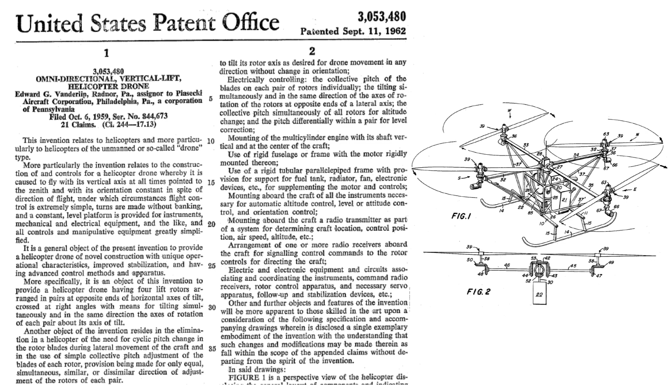Another object of the invention resides in the elimination in a helicopter of the need for cyclic pitch change in the rotor blades during lateral movement of the craft, and in the use of simple collective pitch adjustment of the blades of each rotor, provision being made for only equal, simultaneous, similar, or dissimilar direction of adjustment of the rotors of each pair.

Still another object of the invention resides in the provision of a 4-rotor helicopter drone having similar rotors equidistantly spaced at the ends of 90-degree disposed axes, the direction of rotation of the rotors on one axis being alike and opposite to those on the other, whereby torque balance is effected, together with means to drive all rotors at the same speed, and means to separately and inversely adjust the pitch of the 2 pairs to correct for inadvertent yaw, whereby orientation may be maintained constant, or by opposite tilt of either or both pairs of rotors achieve lateral flight in any desired direction.

A further object of the invention consists in the provision of automatic stabilization and control means for the helicopter drone described, including rotor pitch adjustment and rotor tilt servo means, attitude, altitude, direction, and other condition-responsive means and associated command and control devices, mixing circuits, and the like adapted to provide a fully automatic drone capable of holding a position, a course, or an altitude and/or changing any or all of them on radio command.

Among still further objects and features of the invention may be recognized the following: constructional characteristics of the fuselage contributing to the stability, lightness, and operability of the drone. Arrangements for folding the rotors of one pair and their drive and support means to effect major savings in storage space required, especially helpful aboard ships. Simplified transmission means between the engine and the rotor drive shafts to synchronize the rotors and effect opposite rotation of the pairs. Mounting of each rotor at the end of a tube housing its drive shaft and arranging the tube for partial rotation to tilt its rotor axis as desired for drone movement in any direction without change in orientation.

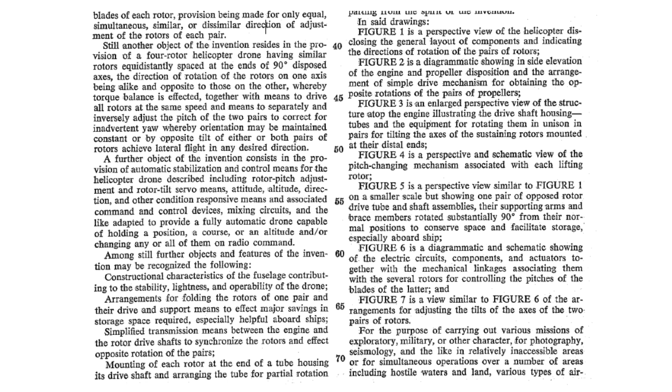In said drawings, Figure 1 is a perspective view of the helicopter, disclosing the general layout of components and indicating the directions of rotation of the pairs of rotors. Figure 2 is a diagrammatic showing in side elevation of the engine and propeller disposition and the arrangement of simple drive mechanism for obtaining the opposite rotations of the pairs of propellers.

Figure 3 is an enlarged perspective view of the structure atop the engine, illustrating the drive shaft housing tubes and the equipment for rotating them in unison in pairs for tilting the axes of the sustaining rotors mounted at their distal ends. Figure 4 is a perspective and schematic view of the pitch-changing mechanism associated with each lifting rotor.

Figure 5 is a perspective view similar to Figure 1 on a smaller scale, but showing one pair of opposed rotor drive tube and shaft assemblies, their supporting arms and brace members rotated substantially 90° from their normal positions to conserve space and facilitate storage.

For the purpose of carrying out various missions of exploratory, military, or other character, for photography, seismology, and the like in relatively inaccessible areas, or for simultaneous operations over a number of areas, drone craft have been resorted to, but with indifferent success. Aircraft of the more or less conventional type requiring substantial flight speed for maintaining their elevation are obviously incapable of carrying out missions requiring hovering above one area for a sustained period.

For control of flight direction, both elevational and lateral, and speed, as well as maintaining hovering, radio signals may be transmitted from a remote control position and received on the aircraft, and there generate control voltages, which are superimposed on those originating aboard the aircraft by means of a set of mixing circuits, whereby to place the control of the craft, as regards position, direction, and speed of flight and elevation, with the remote operator. For carrying out the above desiderata, the apparatus is constructed in accordance with the showing in the drawings, to which reference should now be had.

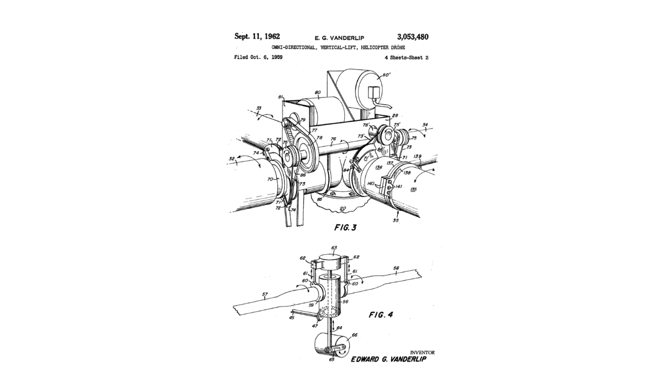Each rotor is equipped solely with means for collective pitch control of the blades thereof, such as illustrated in Figure 4. This figure is highly diagrammatic and does not illustrate all of the mechanical details. As shown, the sleeve 56 may be toothed on its lower edge, corresponding, for instance, to gear 49 and meshing with pinion 47 driven by shaft 45, such as shown in Figure 2. The two blades 57 and 58 of the rotor have their inner ends appropriately journaled in sleeve 56 for rotation about their own axes, whereby pitch adjustment is achieved.

Such rotation must be in opposite directions for the two blades, as illustrated by the arrows, so each blade has secured thereto a collar 59 having an arm 60, to which is pivoted, as shown, a link 61. The arms 60 are normally directed oppositely, and the two links are pivoted as illustrated in arms 62 extending from head 63, vertically adjustable through the offices of rod 64, articulated to the end of radius arm 65, driven from or by the shaft of motor 66, suspended beneath the gear housing 37, as seen in Figure 1,

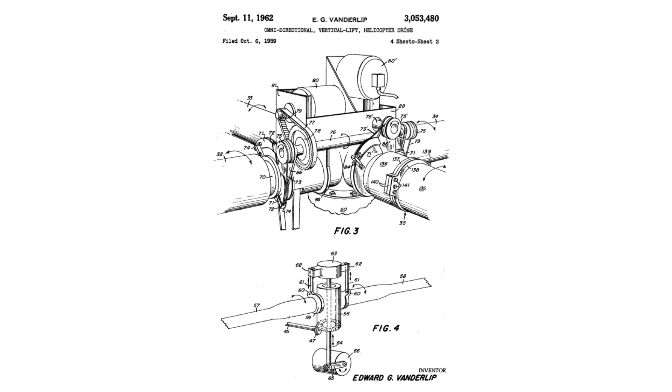Earlier in this specification, mention was made of the ability to rotate each of the propeller-supporting sleeves, 32 to 35, inclusive, for the purpose of inclining the axis of rotation of the rotor at its end. Figure 3 illustrates in perspective the arrangement and mechanism for achieving such results. Here the sleeves 32 to 35, inclusive, are positioned as in Figure 1, above the motor 20, and radiate from housing 28. The inner end of each sleeve or tube is reduced in diameter,

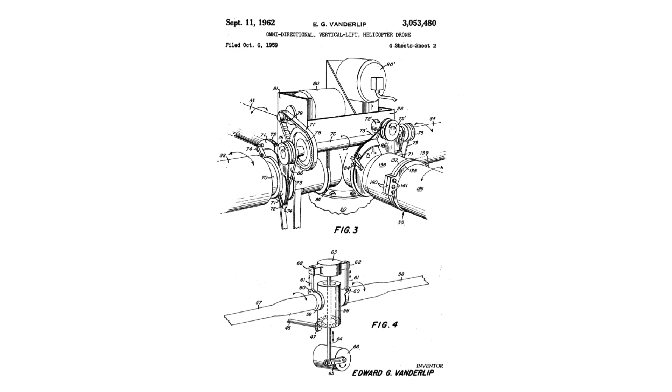as shown in connection with tube 32 at 70, the better to fit it with a pair of arcuate segmental pulleys 71 arranged side by side, and each having a peripheral groove 72 to accommodate the operating cable 73, which passes oppositely through each groove and is secured in an end member 74.

The two partial pulleys 71 are spaced side by side, and the same cable 73 is fastened to end members 74 of both and passes about a turn and 1/2 in a groove in the small diameter pulley 75, mounted on the end of shaft 76, running parallel to one of the sides of the housing 28 and supported therefrom in bearings, not shown.

The other end of this shaft has identical pulley, cable, and partial sheave construction, as just described, for actuating tube 34 in unison with tube 32 by the rotation of shaft 76 to a limited degree by means of the flexible, toothed belt 77, surrounding large diameter sprocket 78 on shaft 76 and pinion sprocket 79 on the shaft of reversible electric motor 80 mounted on end plate 81 of housing 28.

This housing also supports a corresponding but displaced shaft 78A, having at its opposite ends the pulleys 75, connected by cables 73 to sheaves 71 on tubes 33 and 35. A second electric motor 80', connected as motor 80, rotates shaft 78 in either direction to achieve adjustment of tubes 33 and 35, and hence of the axes of the rotors thereon. It will be seen from this construction that the axes of each pair of rotors at opposite ends of a horizontal axis must move in the same direction, or in other words, always remain parallel with each other.

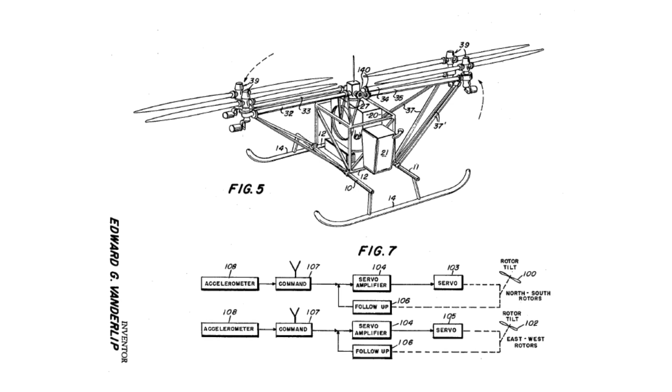In order to facilitate storage of the drone, and especially aboard ships where space is at a premium, means are provided to permit the hinging of two of the pylons which support the rotors at their outer ends, and Figure 5 shows the final result where the tubes 33 and 35 are substantially parallel with 32 and 34, which remain fixed in position.

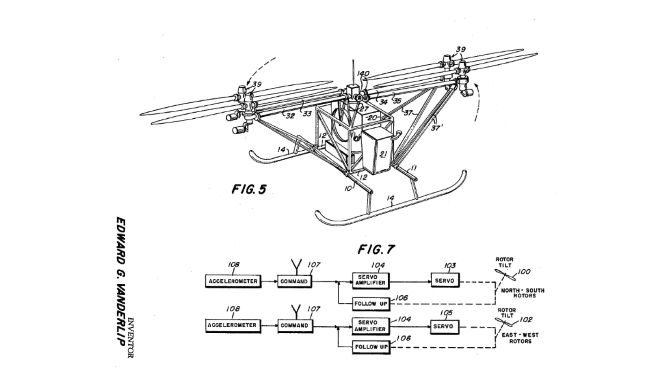From this figure, it will be noted that tubes 33 and 35, normally in transverse alignment across the craft, are each adapted to be hinged in a counterclockwise direction. In order that this movement may be effected, Figure 3 illustrates the manner of hinging the rotor shaft housing tubes for folding. It is shown only on the tube numbered 35 at the lower right,

and here the outer section is transversely separated from the inner section 136, and each of the abutting ends is fitted with a collar 137, 138. Each collar at diametrically opposite positions has a broad radial extension. Two of these, 139, are formed into a hinge by an appropriate vertical pin, while the other two, 140, are arranged to receive through bolts 141, whereby the sleeves may be held in alignment.

The shafts, such as 45 and 46, which are housed within the sleeves or tubes, are severed on the same lines as the tubes, and adjacent bearings, not shown, carried by the tube sections, support the shaft ends. These ends thus being held in appropriate alignment may be fitted with short splined connecting means which automatically mate as the tubes are brought into alignment, care being taken to adjust the rotors to ensure their proper phasing before this takes place. This may readily be achieved by having only one position in which the two shaft sections may be coupled.

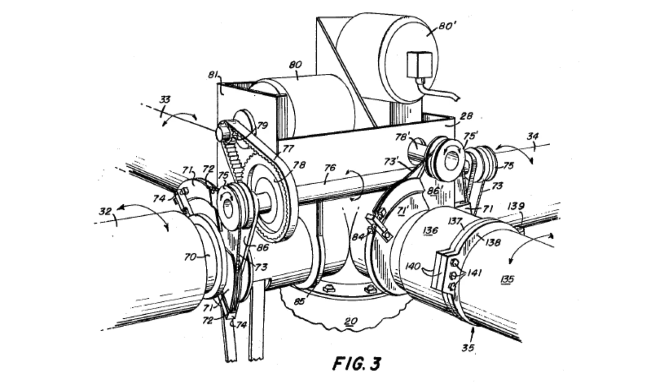The helicopter built as just described has many advantages, first among which is simplicity. For all parts of the frame, motor mount, and the like are rigidly connected together, and there are no universal joints, hinges, flexible couplings or the like, and thus no alignment problems. Only the electronic and control components are shock-mounted. Second, the motor is vertical and in the center of a parallelepiped frame of tubular construction, which supports the base and gasoline tank, as well as a radiator and, if desired, the electronic devices.

Third, all of the rotors, pylons, gearboxes, and the like are identical in construction, and the simplest of gearing is used for drive. Fourth, the arrangement, sizing, and disposition of the rotors, as well as their direction of drive, automatically eliminates any rotational torque, and hence no counter-torque mechanism is required with its complex variable speed drive or pitch control. Fifth, the aligned cross tubes simultaneously adjustable in pairs for rotor tilt permit the determination of the direction of flight without changing the orientation of the craft.

Sixth, by simplifying the rotors so that they are adjustable only for collective pitch of the blades, many excess components are eliminated. The rotors in pairs are simultaneously adjustable and are adjustable differentially between pairs for torque unbalance for yaw stability. The rotors on opposite ends of the same axis are differentially collectively pitch adjustable for roll and pitch stability. And lastly, for altitude change, the collective pitch of all four rotors may be adjusted simultaneously in the same direction.

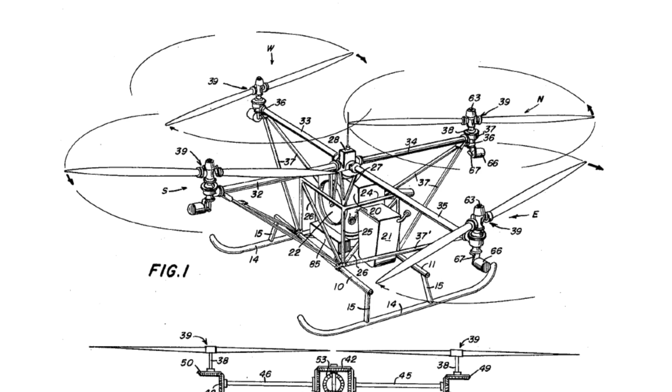An examination of Figure 7 will show the simplest form of combining command and local signals for controlling the tilt of the rotor axes to provide for lateral movement of the craft in any desired direction in accordance with the degree of tilt and the direction thereof imparted to each pair of rotors.

Referring now to this figure, it will be noted that the rotors have been designated as respectively north and south and east and west rotors, and each pair is illustrated by only a single rotor numbered 100 for the north and south pair and 102 for the east and west pair. Since those of each pair are both operated in tilt in the same direction, only a single servo, 103, for the north and south rotors, and 105 for the east and west rotors is illustrated.

These may be any known devices for converting electrical signals to mechanical energy commensurate therewith, and each is energized by a servo amplifier of known type designated 104. Each servo-actuated mechanism moves a follow-up device 106, which detects the degree of adjustment and feeds back a signal to the servo amplifier to terminate the movement when the desired degree of adjustment has been achieved.

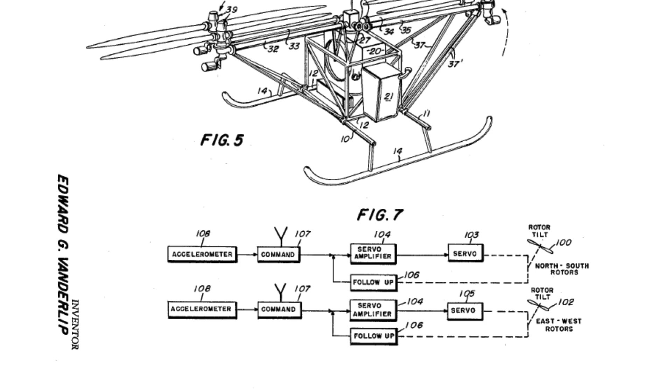Each servo amplifier is shown as under the control serially of a command radio receiver 107 and of an accelerometer 108. Obviously, the command receiver obtains its signal from the appropriate radio transmitter previously described, while the accelerometer is a known type of apparatus aboard the craft for detecting change in rate of movement in the directions controlled by the type of tilt of which its rotors are capable. Thus, when the craft is intended to be stationary, each accelerometer detects motion in either direction in which the tilt of its rotors is capable of moving the craft, and generates signals to provide opposite tilt.

110, 111, 112, and 113 respectively, capable of simultaneously adjusting the pitch of both blades thereof to either increase or decrease the lift thereof. Such servo device will of course include the motor 66, such as seen in Figure 4, and is energized from the appropriate servo amplifier, 115 to 118, under the control of commands from craft-carried instruments and radio signals, as well as the associated follow-up device, such as the one designated 120 on the north rotor, which provides for a feedback from the rotor pitch position to the input of the servo amplifier to limit and maintain the desired setting or commanded adjustment.

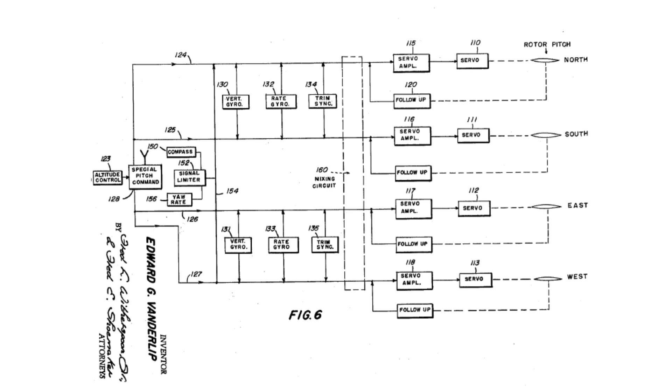The dotted rectangle 160 marked mixing circuit is symbolic of the rather complex electric circuits necessary to bring about the connections and operations of the instruments as above described. But since these are quite similar to those used in autopilots for conventional aircraft with the necessary modifications to effect the more exact and slightly different control essential for this particular craft, it is not believed essential to show the electrical connections in detail.

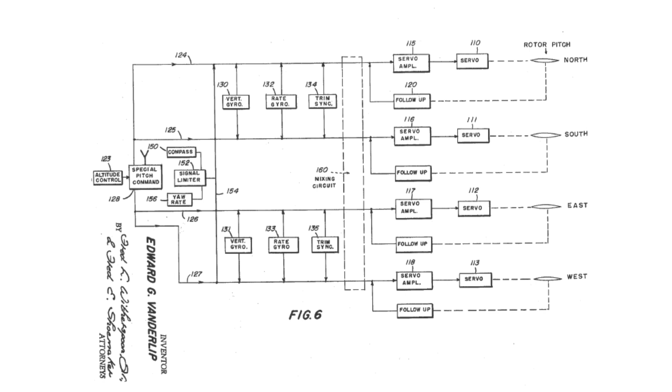In operation of the craft, its position can be followed by radar within its range, or a complex system of radio-established coordinates, such as comprised, for instance, in the hyperbolic grid tracking system of the Raydist or Decca type may be used. These systems provide for a high order of accuracy and may cover an area of several thousand square miles and can be set up on land or sea or both with portable or fixed stations.

Such systems permit the position of the drone in the tracking system to be communicated from the drone by a transmitter aboard it and to be represented on a screen to an operator who then controls the drone by radio signals as pointed out. Since both the Raydist and Decca systems are well known, and since they form no part of the present invention, it is believed that further description is unnecessary here.

The drone may be launched from land or shipboard by visual remote control, and as soon as it is adequately clear of the landing field or ship, control may be transferred to an operator in the command station associated with the radar, Decca, or Raydist system. He may follow the operation of the craft and command its movements by suitable apparatus in control of the 3 radio transmitters previously described. The operator is thus enabled to move the drone to any point in the grid system setup where the mission for which the craft is sent out may be achieved.

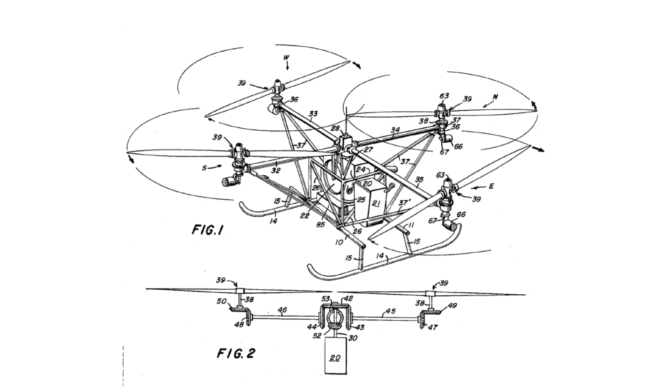14. A helicopter drone arranged to fly as a level platform at all times, and including in combination a power plant, 4 multi-bladed rotors, each having blades arranged solely for collective pitch adjustment, means driving said rotors all at the same speed from said power plant, means supporting said rotors in pairs on horizontal axes intersecting at right angles,

means to detect deviation from the horizontal along each axis, and means responsive to the deviation detection on either axis to appropriately differentially adjust the collective pitches of the rotors on said axis to re-establish the level, and rotor attitude adjusting means to achieve lateral drone motion while maintaining said level platform.

15. A helicopter drone arranged to fly with a constant heading at all times and including in combination a power plant, 4 multi-bladed rotors, each having blades arranged solely for collective pitch adjustment, means driving said rotors all at the same speed from said power plant, means supporting said rotors in pairs on horizontal axes intersecting at right angles.

Said driving means rotating the rotors on each axis in the same direction but oppositely on the 2 axes, means to detect yaw or deviation from said heading, and means responsive to such detection to collectively increase the rotor pitches on one axis and collectively decrease the pitches on the other axis to restore the said heading. Said responsive means comprising a motor allotted to each rotor and means mechanically connecting each said motor.

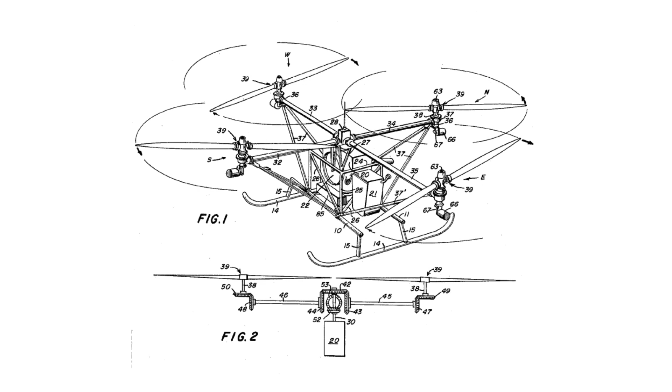18. The drone as defined in claim 16, in which follow-up mechanism is provided under the control of each rotor pair axis tilt, and mechanism actuated by the follow-up mechanism to terminate the responses of the rotor axis tilting means when the flight direction is achieved as directed.

19. A helicopter drone having in combination a frame, a power plant on said frame, 4 similar rotors, means on said frame supporting said rotors for rotation about generally vertical axes at the ends of horizontal axes crossed at right angles, means to drive all the rotors from the motor at the same speed,

those on each horizontal axis in the same direction but opposite to those on the other horizontal axis, and means to tilt the axes of rotation of the rotors at the ends of and about each horizontal axis in the same direction simultaneously to achieve lateral flight with constant heading.

20. In a helicopter in combination, 4 similar rotors, a frame mounting said rotors for rotation about substantially vertical axes at the ends of crossed horizontal axes in balanced pairs, means to drive all rotors at the same speed, those on each axis in the same direction but opposite to those on the other axis, and means to tilt rotor axes of each pair together only about their connecting horizontal axis, whereby to achieve lateral movement of the helicopter in any direction without change of orientation.